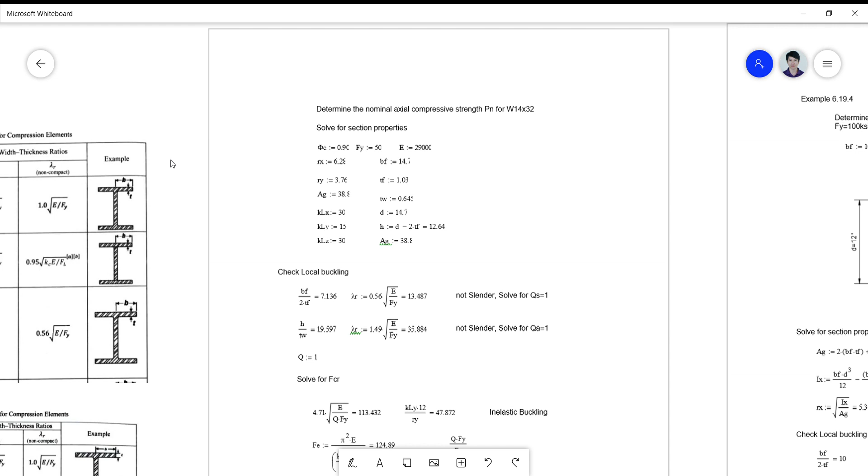So I have here a problem on the determination of local buckling effect on rolled shape sections, particularly wide flange sections. We are simply asked to determine the nominal axial compressive strength Pn for a W14 by 32 shape, which is of course a standard section. The properties are given here, and the first thing to do is to check the effect of local buckling.

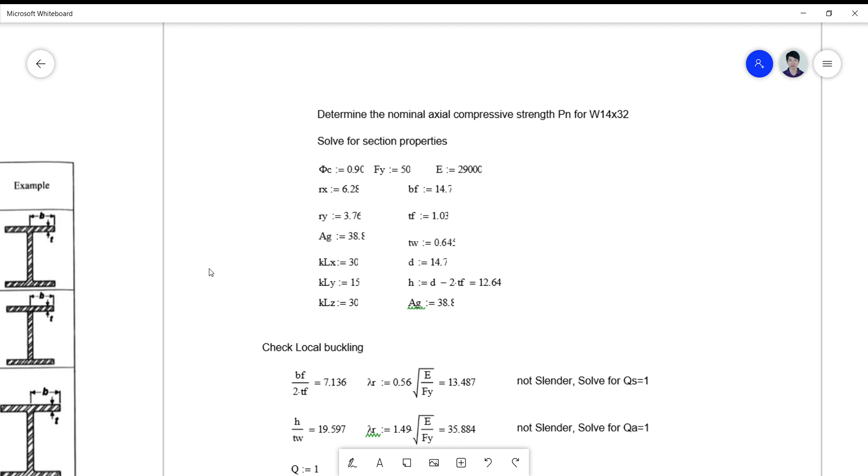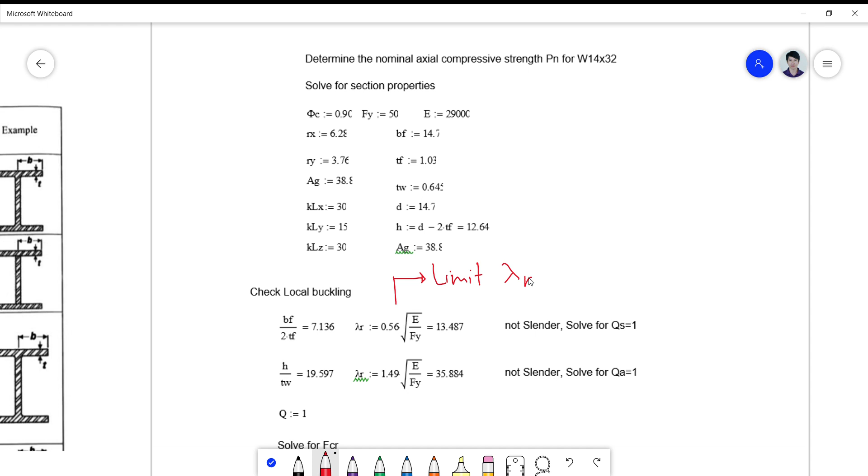So in this particular problem, we need to have the limits, lambda r, that we will use to compare with the actual. So these are now the limits of the width to thickness ratio, lambda r, and these are the actual width to thickness ratios, the actual lambda.

So for the unstiffened element, we are now checking local buckling for both the unstiffened element and the stiffened element. These stiffened and unstiffened elements are simply the ones that compose your W14 by 32.

So this part here becomes your unstiffened element with a width of BF over 2. This is now your unstiffened part, and this element represents your stiffened part. The unstiffened is actually the overhanging flange or projected flange, and the stiffened part is actually your web.

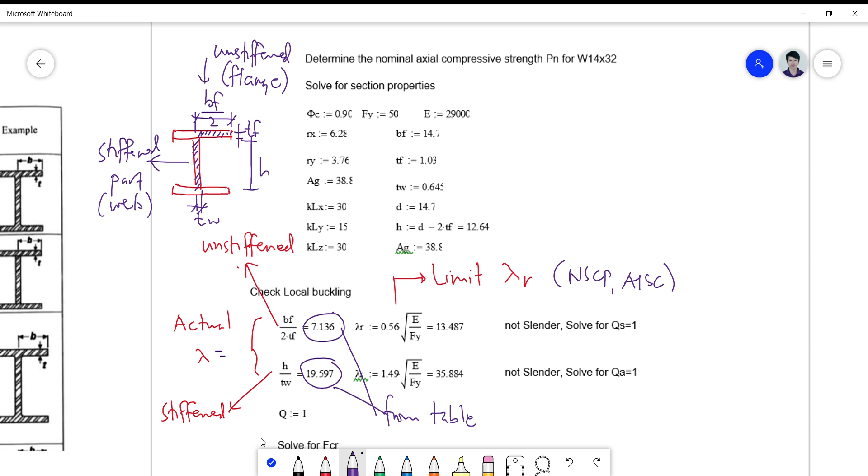Now, to check the limiting value for lambda r, we need to look into our reference, the NSCP or the AISC reference for this. I have here a part of the table wherein the values of the limits lambda r can be obtained. So for lambda r, we now refer to case 3.

This is a uniform compression. Always your uniform compression pertains to column problems, while flexural compression pertains to beam problems. Later on we will be using these values for beam behavior.

So for uniform compression in flanges of rolled I-shaped sections, we need to take the value of 0.56 square root of E over Fy.

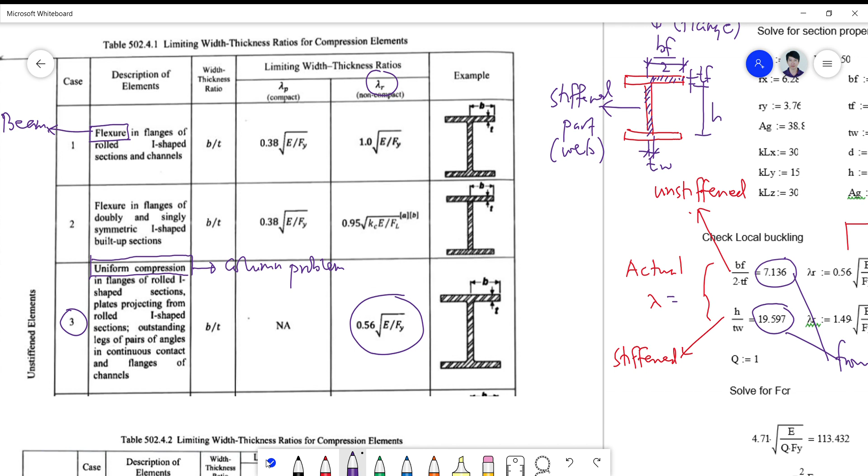And for your stiffened part, which is the web, we can look into case 10, which is again a uniform compression pertaining to a column problem. So this is 1.49 square root of E over Fy.

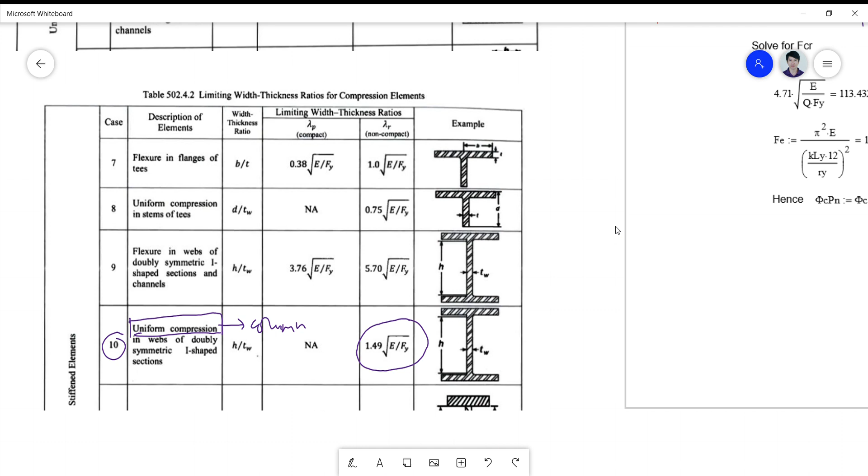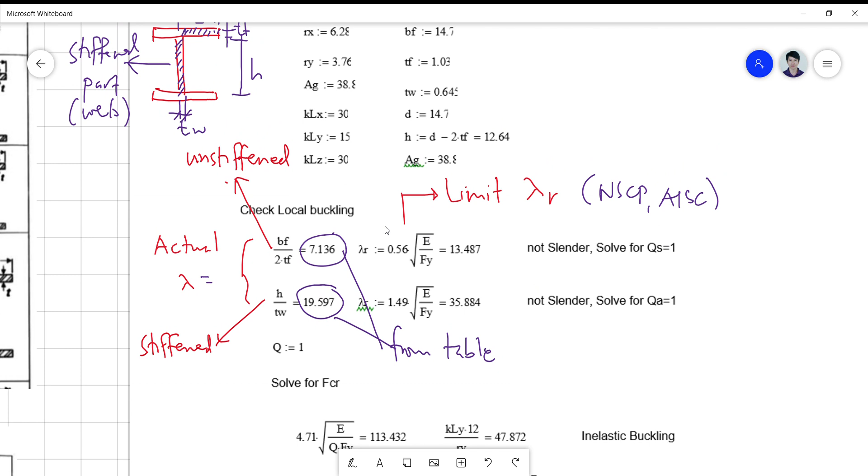So those are the values that we are going to compare with the actual lambdas. This is computed to be 0.56 square root of E, which is 29,000 KSI, divided by Fy, given to be 50 KSI. So this is 13.487.

And for lambda r of the stiffened part, which is the web, we have 1.49 square root of 29,000 over 50, which is 35.884.

Obviously, since your actual is less than the limit both in the stiffened and unstiffened section, then we can conclude that your section is not critical for slenderness, and therefore we assume the value of QS and QA to be equal to 1, or simply conclude that there is no local buckling behavior that will occur.

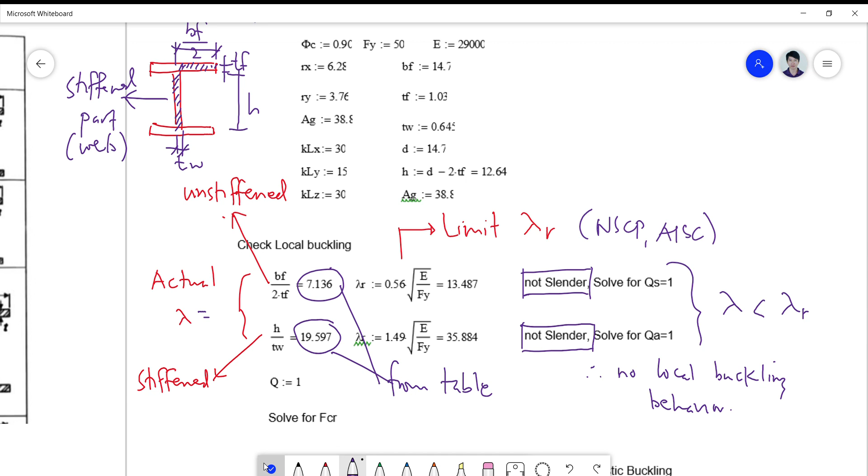Okay, so for your nominal capacity now, we simply proceed with the usual computation of our limits for lambda, C sub C. This is the limit C sub C, and this is now your actual weak axis buckling. So KL over Ry, since Ry is the weaker axis, we multiply by 12 to convert it to inches.

We get 47.872, less than 113. Therefore, it's inelastic buckling, and hence, if we consider now your column strength curve, this is our 113.432, and our actual value for KL over R is 47.8. So our value for FCR falls on the inelastic buckling region, given by the formula FCR equals 0.658 to the power of Fy over Fe, times Fy.

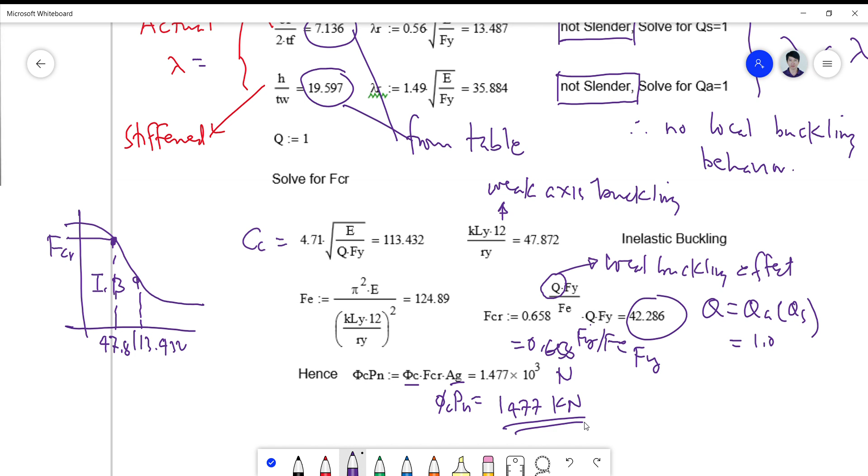So there is actually no local buckling behavior happening to our W shape.

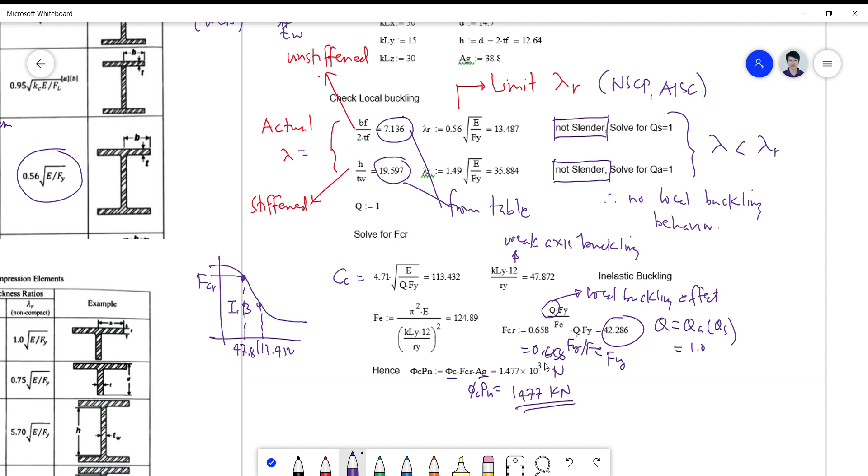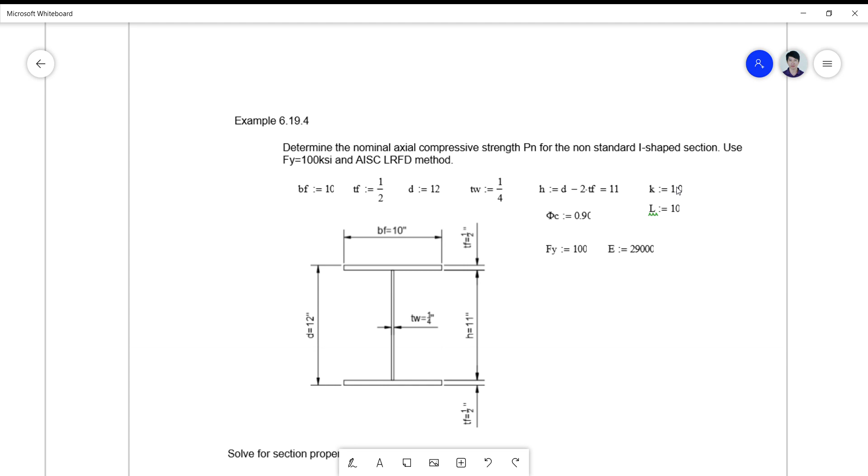Let's now go to the built-up shape of example 6.19.4, wherein this is again also an I section composed of plates. Therefore, this is a built-up non-standard I-shaped section. So we use Fy equals 100 KSI and use LRFD method to compute for the nominal compressive strength Pn. The given values are the plate dimensions for the web and the flange, and your Fy is 100, and your KL is simply equal to 10 feet.

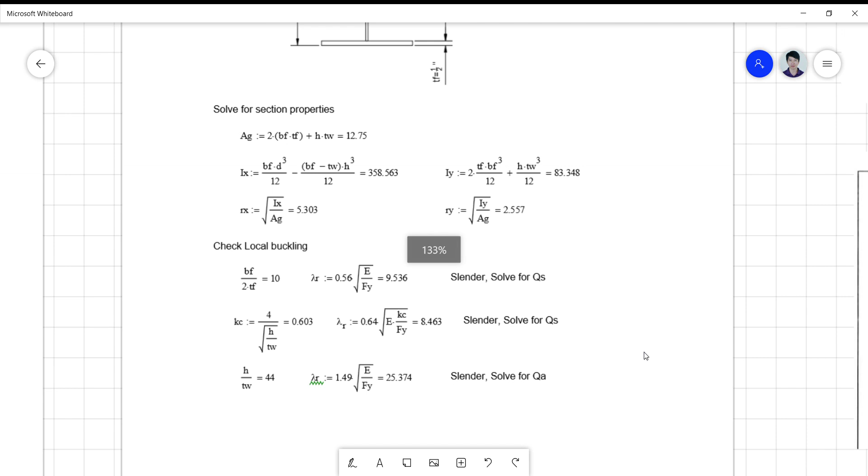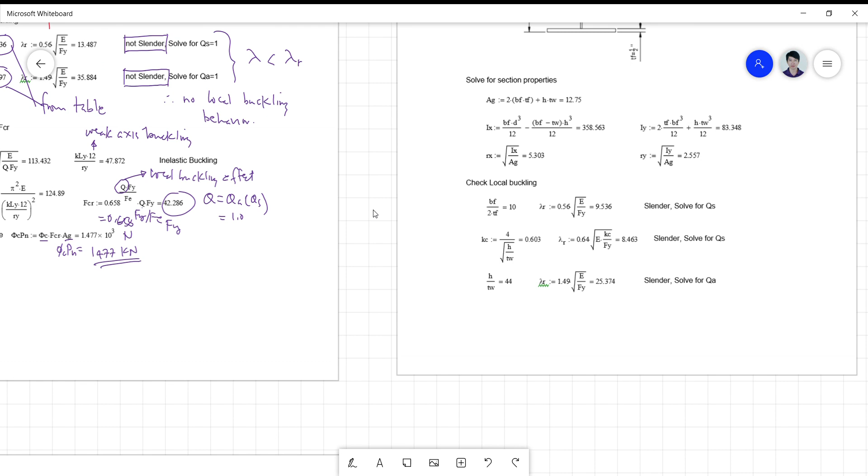So that's 10 feet effective length. So first we solve for the properties.

Since this is a non-standard section, we have to deal with the computation of the area, the moment of inertia, and the radius of gyration. Of course, the centroid is exactly at the center of geometry, which is this one.

If we compute the area, we just compute the flanges and the web. The total area now is 12.75, and your Ix is simply equivalent to this formula. This is actually another way of solving the moment of inertia of an I section.

Of course this is in inch cubed, this is in inch squared, and your Iy is simply this one. We also use the transfer formula for the moment of inertia to obtain this value in inch cubed. So for your Rx and Ry, we simply use the formula square root of Ix over Ag and Iy over Ag.

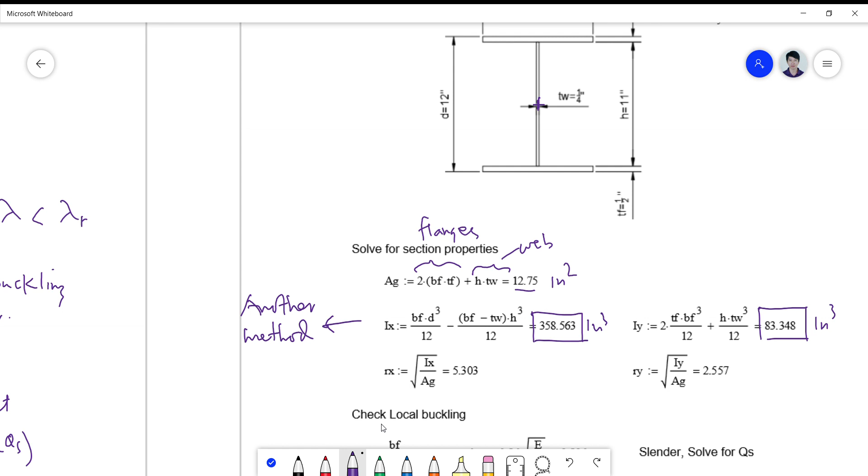And we check for the local buckling effect by simply comparing your actual lambda, Bf over 2tf for the flange, and this for the web. So the flange is actually for the unstiffened element, and the web is for the stiffened part.

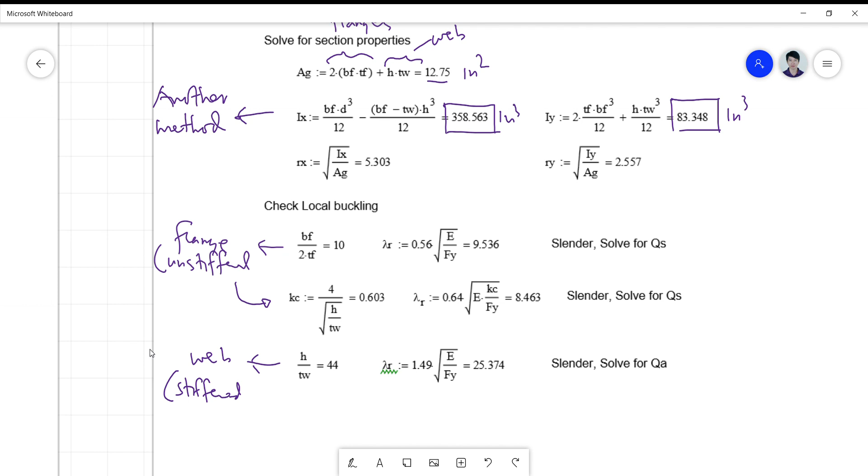So take a look at the comparison. For a built-up shape, this is actually the more exact comparison for your lambda R, since in our table we can refer again to the table here, and take note that we are now dealing with uniform compression of a built-up section, not a rolled shape. So this is the more precise value of it, not 0.56.

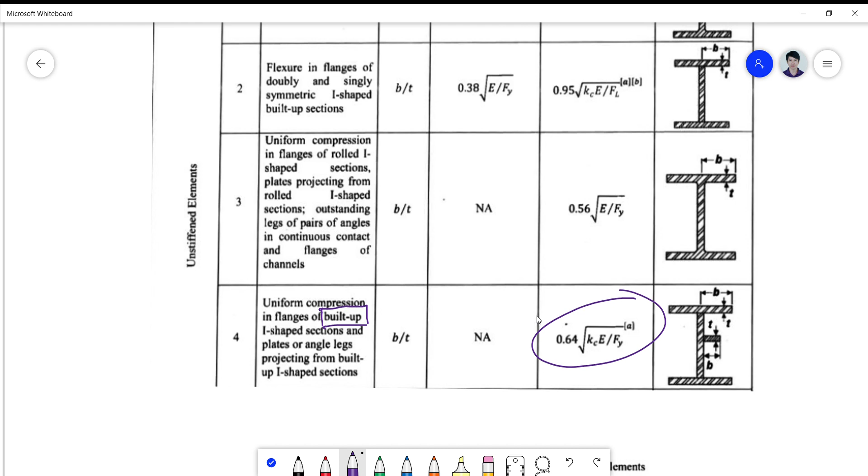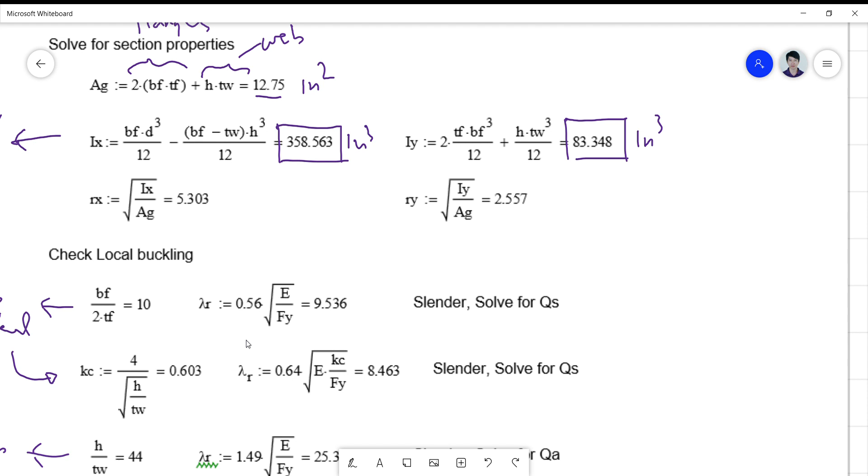But why did I use 0.56 here? This is just a logical comparison: if your lambda R on the basis of this formula is greater than this other value, then it is more likely that it will be greater than the actual lambda R. So this is just a practical analysis that compares a smaller limit to a bigger limit.

So if the bigger limit is exceeded, then it is concluded that the smaller limit will also be exceeded. That's why sometimes you don't need to get Kc — you simply take a look at this formula and compare. If this exceeds, then it is slender. If it does not exceed, then you have to check the smaller limit, because the value of Kc ranges from 0.35 to 0.76.

In this particular problem, our value for Kc is 0.603 on the basis of this formula, and if you substitute it here, we get this value. So in either case, I have proven that the actual width-to-thickness ratio is greater than the limits, therefore both are slender. So Qs is actually less than 1.0.

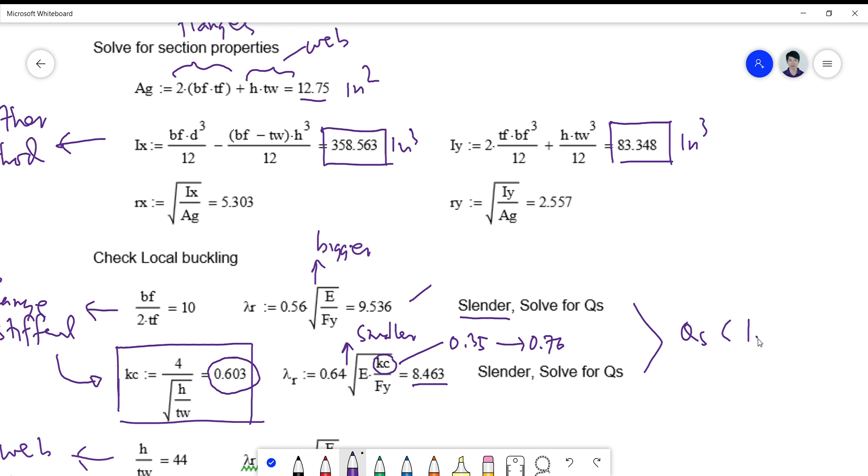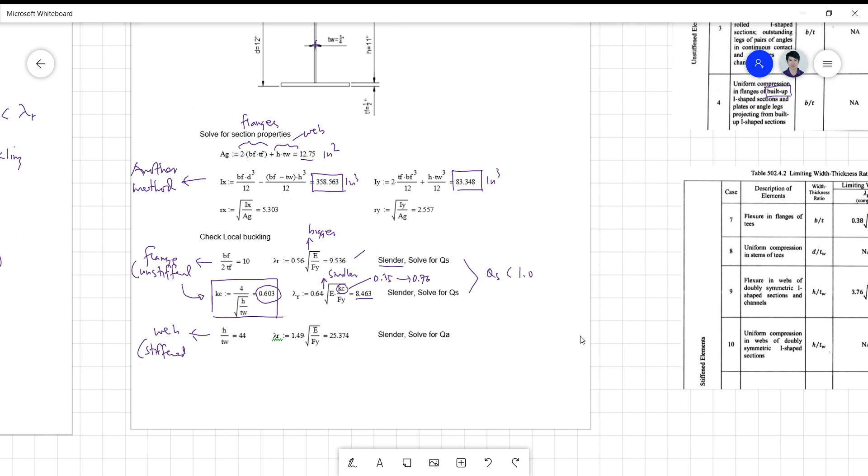And for your web buckling requirement, again we look into the table. For the web buckling requirement, we note that case 10 is actually uniform compression in the webs of all doubly symmetric I-shapes, whether rolled or built-up. So this is applicable to both rolled sections and built-up sections, just the same as the problem in the first example.

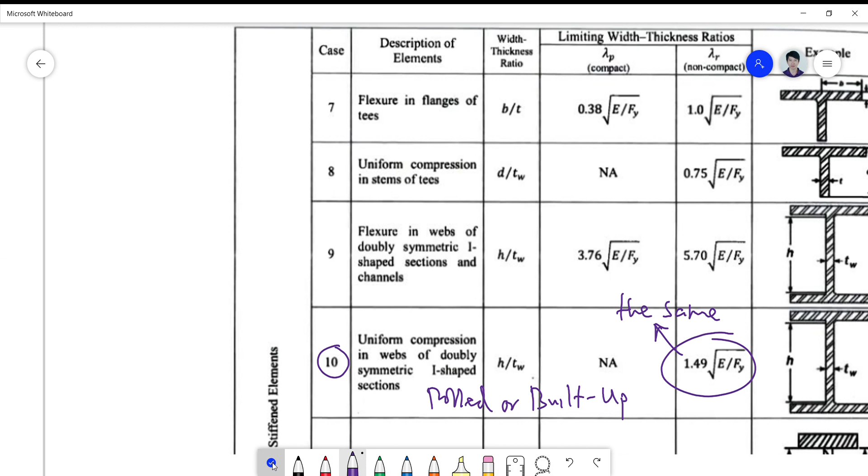So this is 1.49 square root of E over Fy, 25, and H over Tw. You can get this again from the table, or if you don't have a table, you have to compute it. H over Tw is equal to 44, greater than 25. Therefore, again, it's slender. Then your QA now is less than 1.

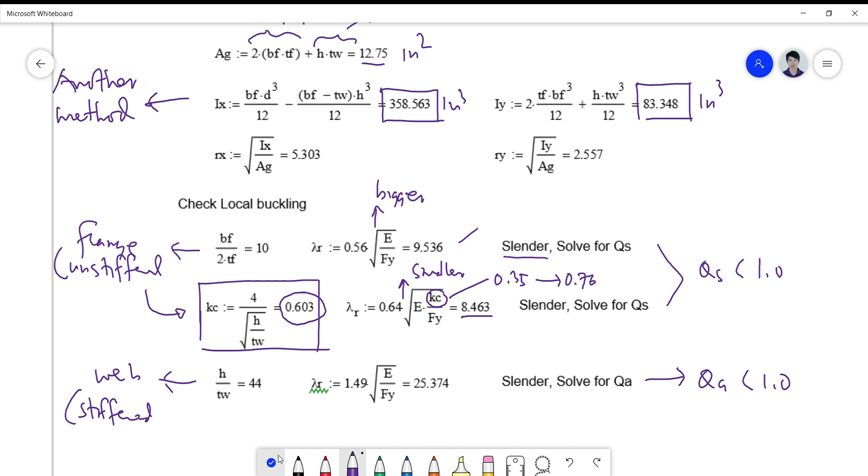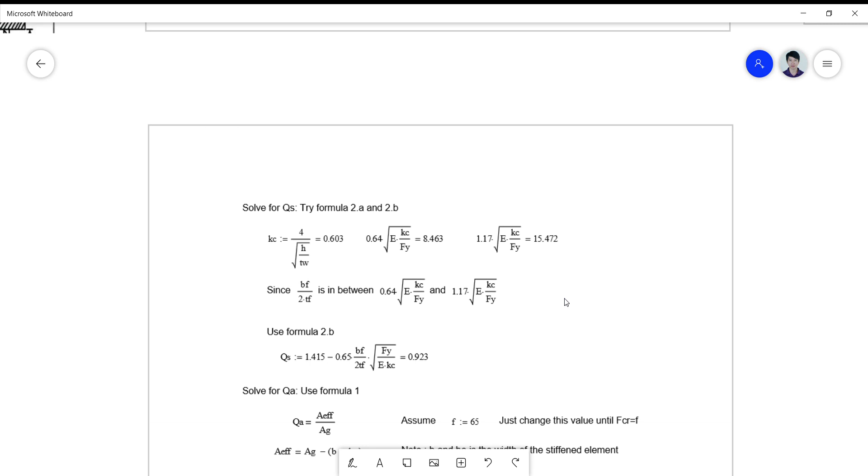So we need to solve now QS and QA on the basis of the lecture I gave you a while ago. In order to solve for QS, we simply apply formula 2A and 2B. So we try formula 2A and 2B on our reference. So where's that formula?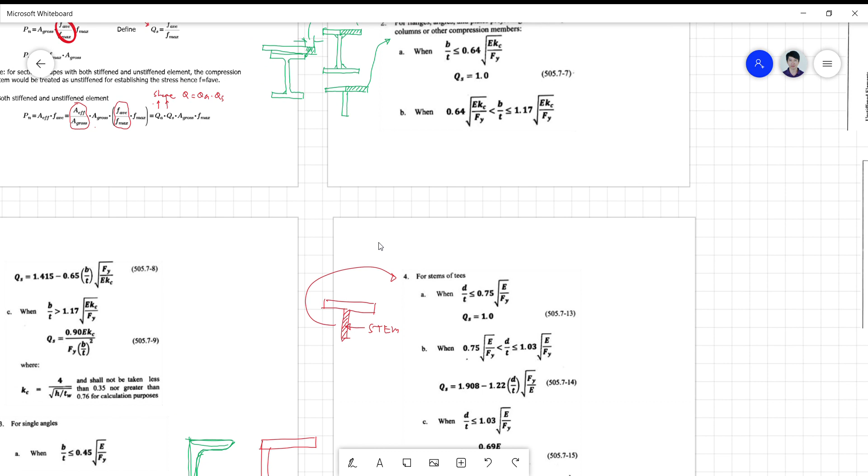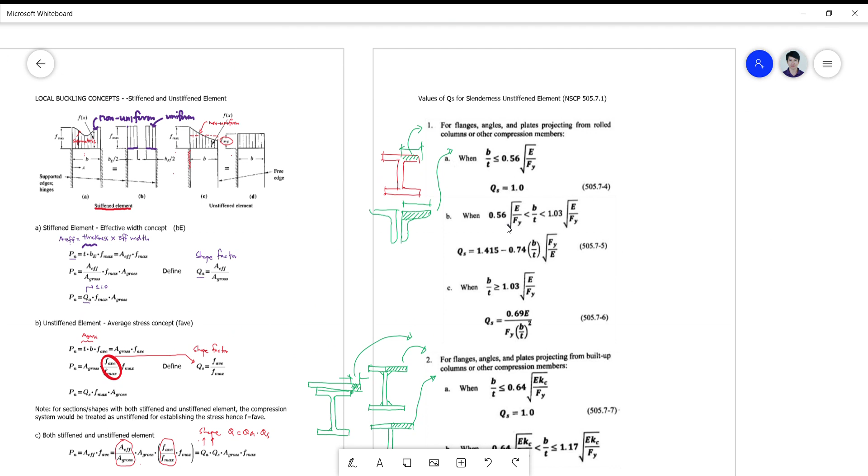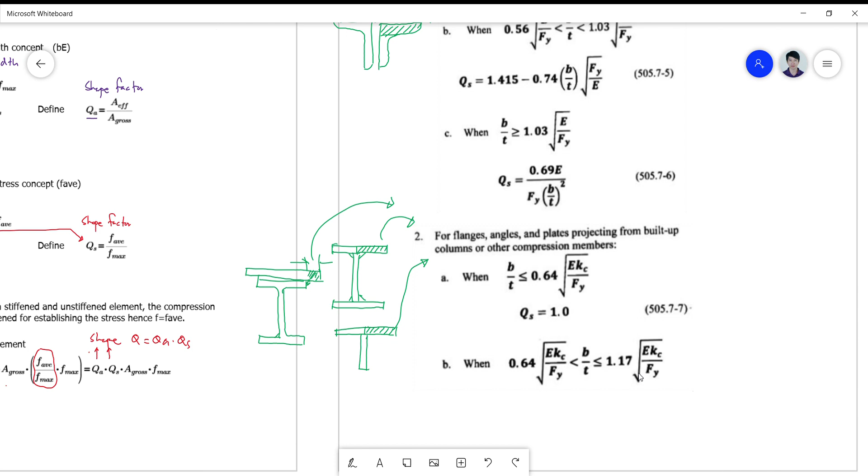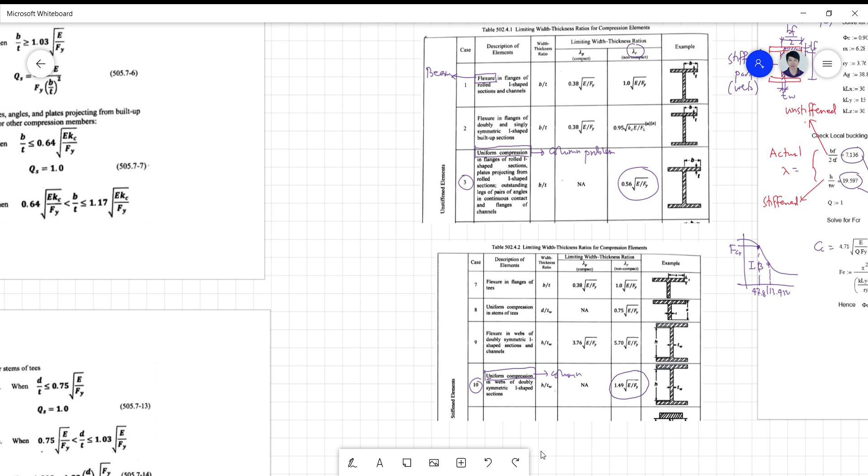I think this is the one. Okay, so this is now 2A and 2B. So this is the formula that I'm referring to. We have to apply the use of this formula here and this formula here, and check whether this B over T ratio, or this lambda ratio, falls here or falls in between these two values.

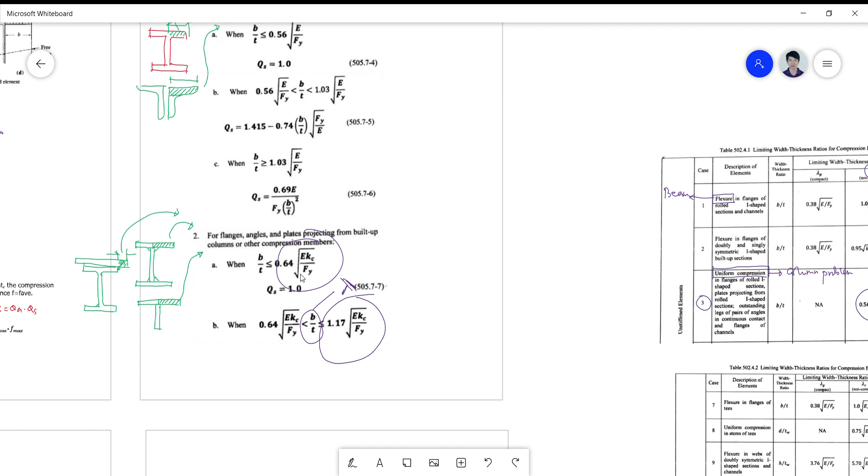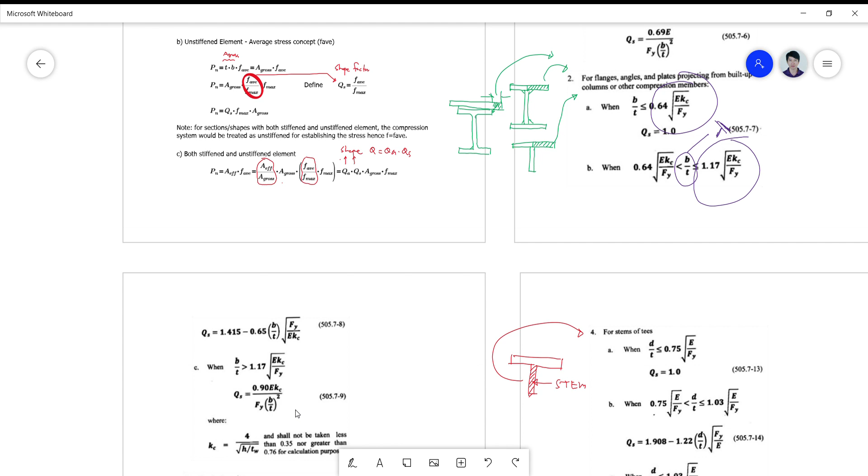So if it falls here, then QS is equal to 1. If it falls in between, then QS is given by this formula here. And if it exceeds the value of 1.17, your formula will be a slender formula similar to the format of the Euler formula in your global buckling concept. Okay, so let's now check.

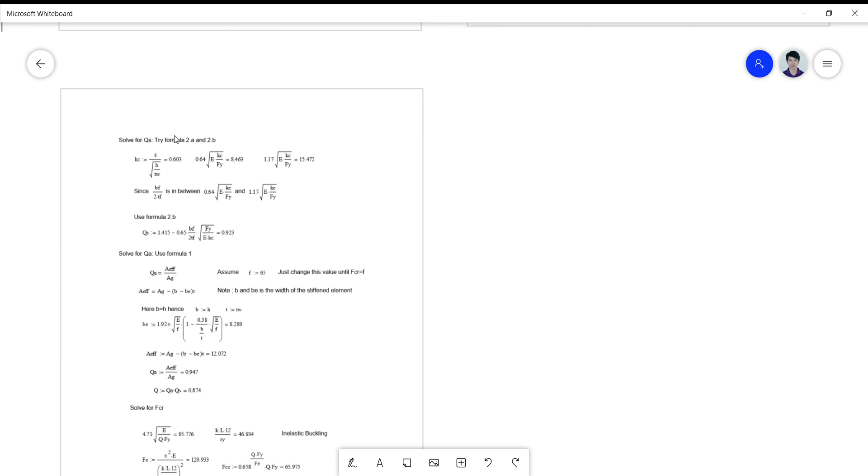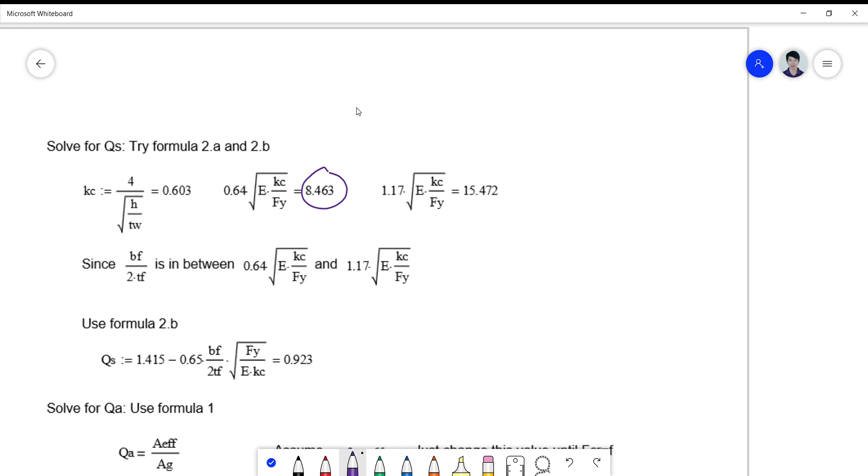So for the value, we actually have solved already this value here, which is 8.463. So your actual BF over T is actually greater than this, which is 10. So if you look at B over T here, it's actually 10. So our value here of lambda, which is B over 2TF, is 10. So this is greater than this, but less than this. So our lambda is in between these two values.

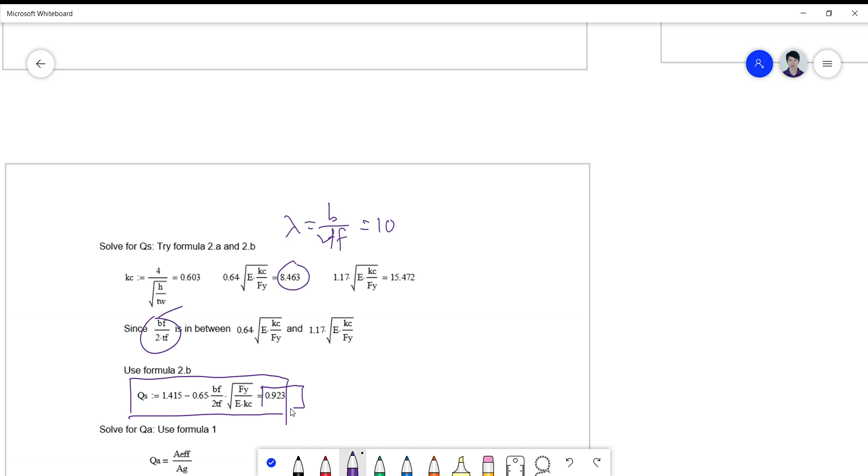Therefore, we use the formula for 2B, which is this one here. So QS now becomes 0.923. So for your QA value, we have to use the analogy on the shape factor QA equal to A effective over AG, or A gross.

So the computation for this is actually a trial and error solution, wherein you have to assume first a value of your f, and f can actually be a good guess, can actually be fy. So for conservative results...

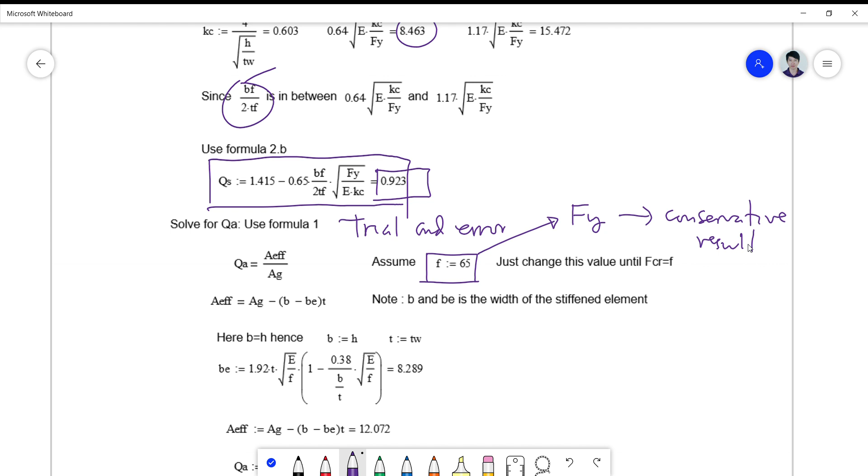For this particular problem, I made a guess equivalent to 65, and let's check whether your FCR will actually be very near to the F that was assumed. So the checking is: you assume a value of F and then you check FCR, if it is very near to your assumed value of F.

Okay, so we proceed now with A effective. So the area effective is simply the gross minus the ineffective. So this is now the ineffective area. So the gross area minus the ineffective area will give you the effective area.

Here, your B, since we are referring here to the stiffened element, and the stiffened element is actually the web, this is the one that is referred here. So instead of having a B value, we are actually referring to an H value here. So we assume that B is equal to H. Hence, your B effective now becomes...

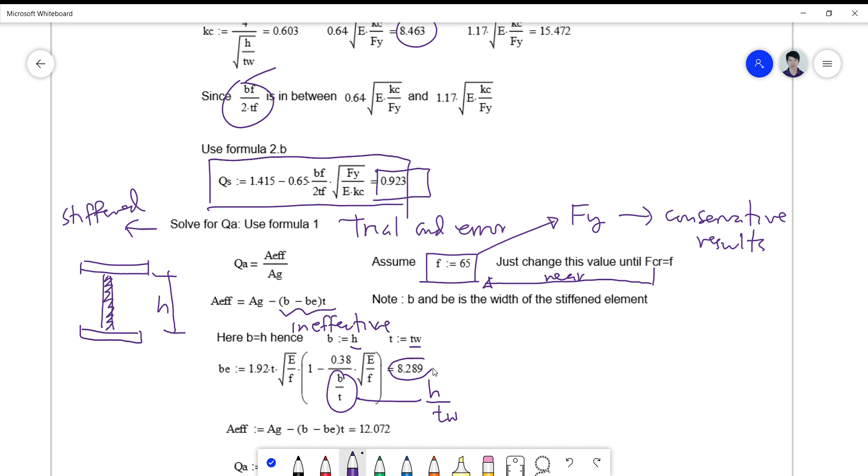So you get your B effective to be 8.289. And your area effective now becomes AG minus (B minus Be) times T, which is equal to 12.072. You now divide this A effective by the gross area, then you get 0.947. So your total Q now becomes the product of QA and QS, which is 0.874.

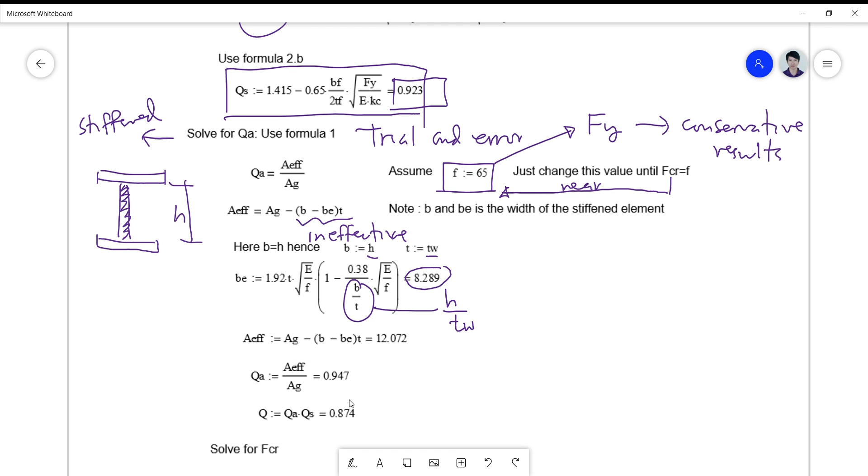And then we solve your FCR on the basis of the formula for local buckling. So the only difference between this and the global buckling is this value here. So take note that Q is always inserted beside FY. So lahat ng may FY, lalagyan mo lang ng Q, okay? So Q is inserted beside Fy.

There, you get your C sub C, which is this. Then also in this formula, you have to insert Q in the Fy there, and also here you insert Q in the Fy to get your final FCR, which is 65.975. So this is very near to our assumed value of f equal to 65.

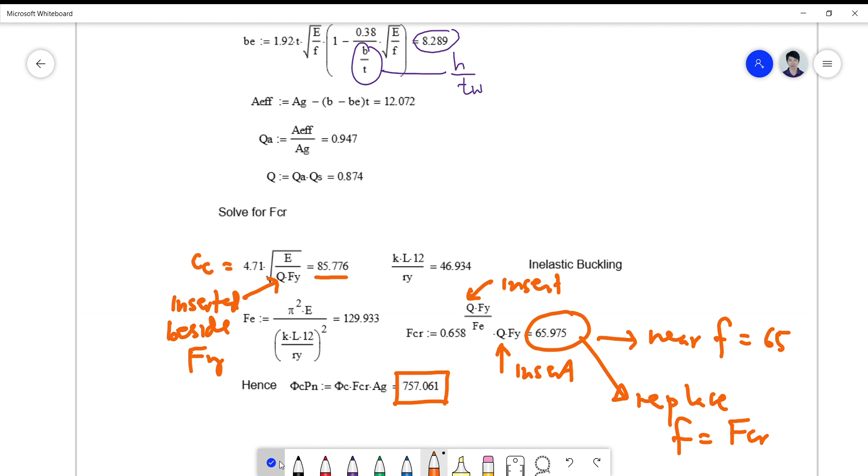So you can stop here right now by concluding that your PN is equal to FCR times AG, equivalent to 757.061. So in case this is not yet near to your assumed value, then what you're going to do is to plug in or replace your F with your FCR and then recompute QA and QS.

Okay, so that is how you do it in a trial and error format. This procedure is easier done using, of course, a program such as MathCAD. I'll show you the use of such iteration regarding the trial and error method on the value of f after this video. Okay, thank you very much for listening.